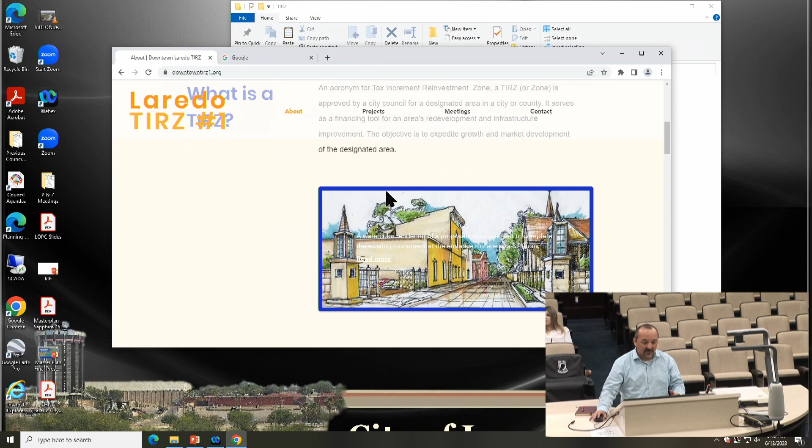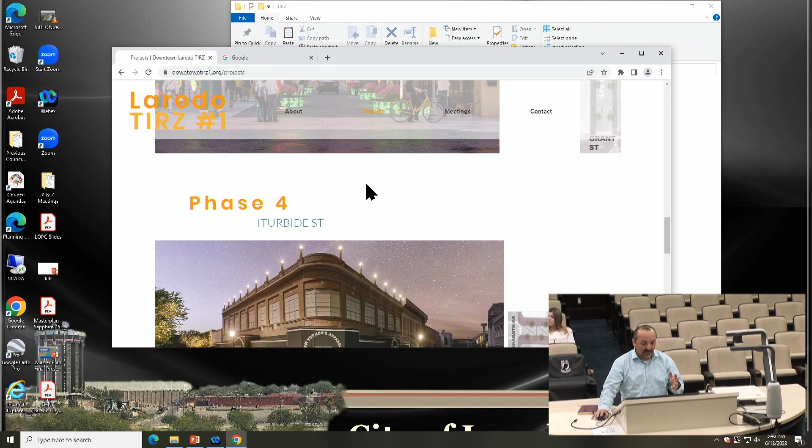We'll make sure to get with the planning department to link to it. We do have our about the TIRZ section, the history of the TIRZ, the current board of directors, and the related documents related to the formation of the TIRZ. We do need to update it a little bit. We have more information related to the phase 1 projects. Again, we'll work on that here to get it more up to date.

It does have the meetings, so all of the meetings are on here. If you click here for access, it takes you to the City of Laredo's YouTube webpage, which has all of the meetings listed. So all of this information is readily available and accessible to anyone that wants to find it.

Do you have minutes, Rick? Do you have the minutes up? I don't have the minutes on here, so we're trying to collect all of those. I know we have some. If you can send those to us, we'll link those here as well. We'll go ahead and create another tab for the minutes and just add it to it. So this is a work in progress, obviously, but it's there, and we can certainly tweak it as we see fit.

Just to let you all know, we did obtain the domain for 2 years. It was like buy one, get one free, so we got it for an extra year. And we went ahead and purchased the hosting for a year, so that was the cheapest way to do it. At the next board meeting, we'll run those invoices by so you all can see what that cost was, but it was pretty minimal.

So you're saying Able City is the owner of the site for right now? Yes, for now. Were we going to switch it over, or compensate you guys for doing that? No, I think at the last meeting we were directed to just manage it as a reimbursable expense. It belongs to the TIRZ, not to us. I'm just saying we'll help you guys manage it. So if you tell us what to put on it, what to move, we're certainly available to do that.

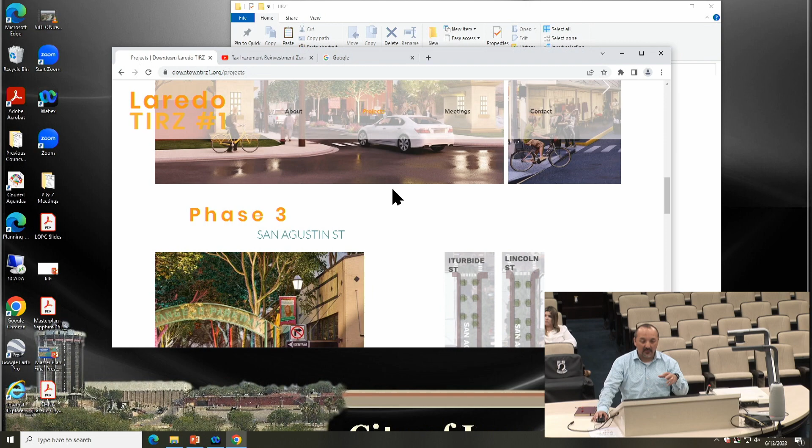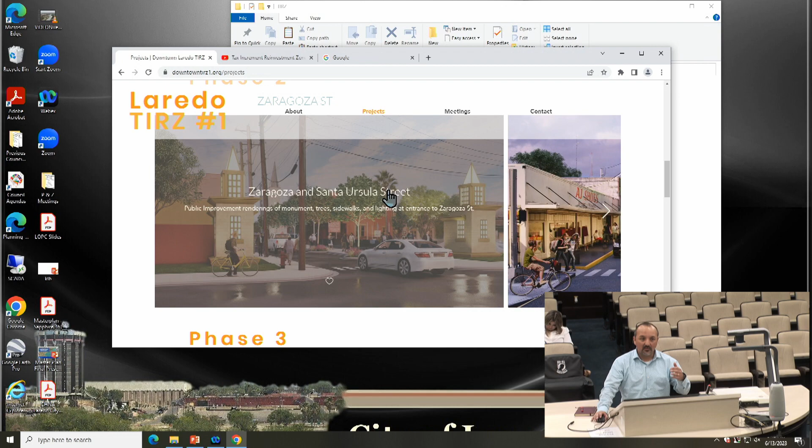Rick, is it possible to also add some conceptual drawings? Whatever you feel comfortable sharing in terms of construction drawings. Under projects, we're going to revamp this a little bit to show the latest information. We had listed phase one, phase two, phase three, but we'll revamp that to show phase one, which is the project KCI is currently working on, and then phase two, which is the grant we're attempting to get. So we'll revamp this to have the most current information on it. And it has the zone map, right? Yeah, here it is. Okay, great.

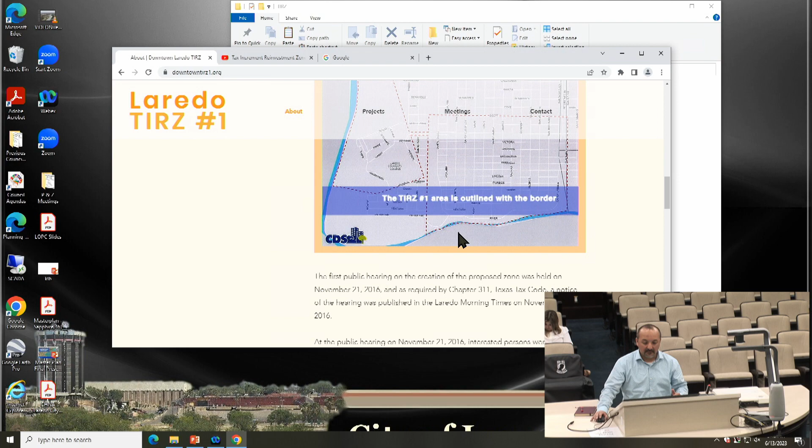So with that said, the only other thing we want to report on is, I think we have an item there for the murals. I know that's been a topic of conversation as we've gone through this. I reached out to the Mural and Wayfinding Committee for a meeting late on Friday. I know it was a quick turnaround, so we weren't able to meet, but we did look at some different options, and I have a brief presentation to go through for you all.

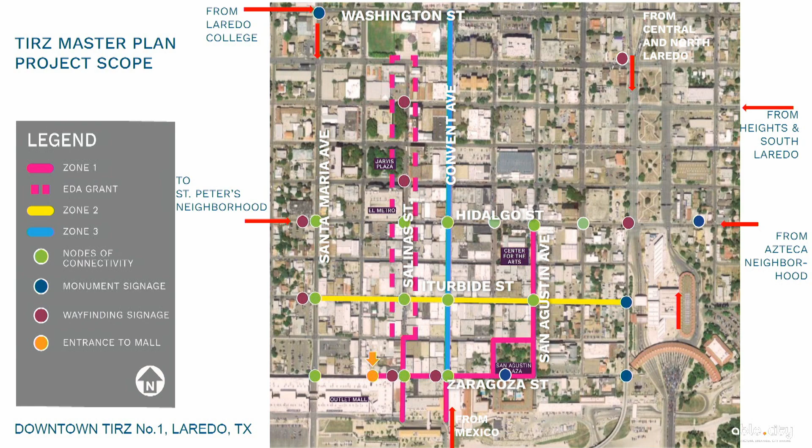Okay, here it is. So again, a presentation on the murals, more related to procurement, because that's the next big hurdle we need to take on. Again, the map, we show this to remind everybody of the scope we're working on. We presented, I want to say back in December 2021, some suggested mural locations, and we've listed about 7 of them here, 8 actually.

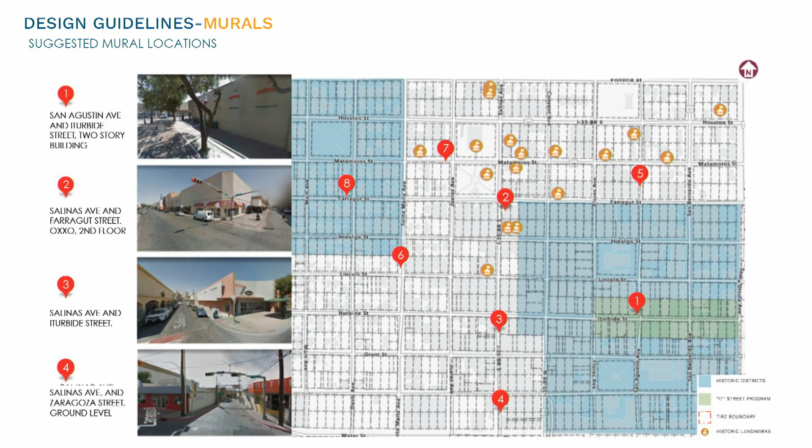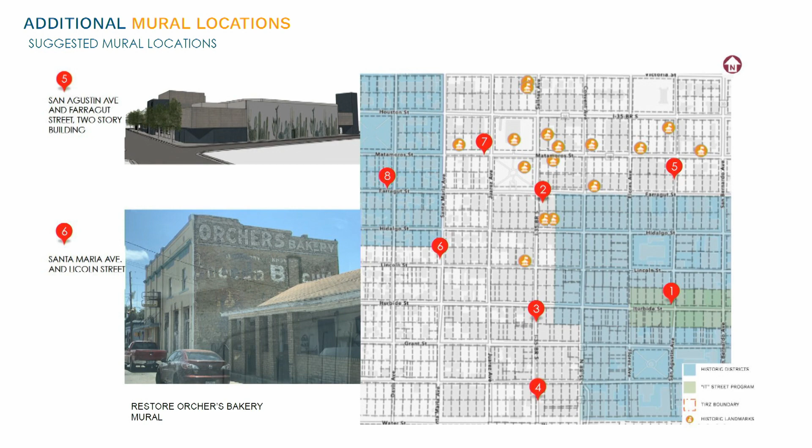We met as a team earlier today to narrow some locations down to move forward. You can see the first 4 here, some great locations where we could probably put murals. We have the old HEB, which is now going to be the Sheriff's Office building, the Orcher's Bakery mural, the Housing Authority building, and this wall along Farragut and Davis Street, which is a little off the beaten path.

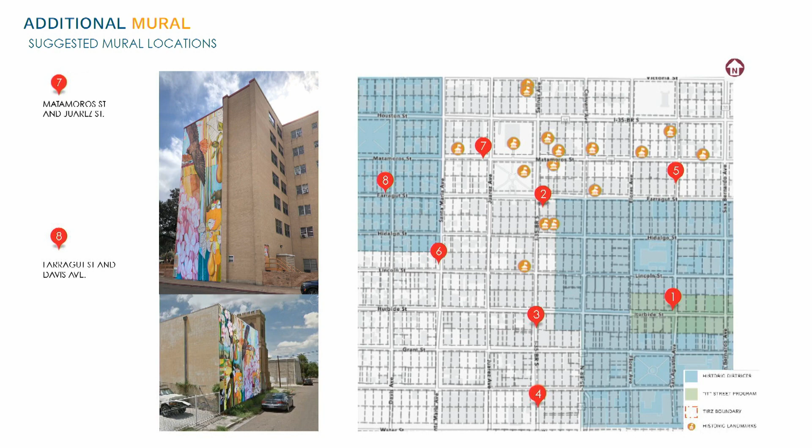Looking at this, we think the locations we should be targeting currently are the publicly owned facilities, to minimize that shared agreement timeline. If it's a private building, we need to find the owner and go through the whole process of getting them to agree to allow us to do murals there. So we wanted to hone in on these 2 locations to start, since they were already on our list.

One, we can talk to Webb County. We can also approach the Housing Authority about allowing us to utilize these spaces for the murals. Now, we know we're still going to have to get an agreement with them to do that, but we think that it's an entity that should be easier to work with, we feel.

So we wanted to narrow it down to these 2 locations. Now, of course, this is ultimately your decision. We just wanted to bring these recommendations to you guys. So that's one thing we'd like the TIRZ board to do: rank these locations, or tell us if you even agree with them. If you agree, then rank them so we can approach the different entities in that order to see if we can get them to agree to enter into that agreement with them. So that's the first item.

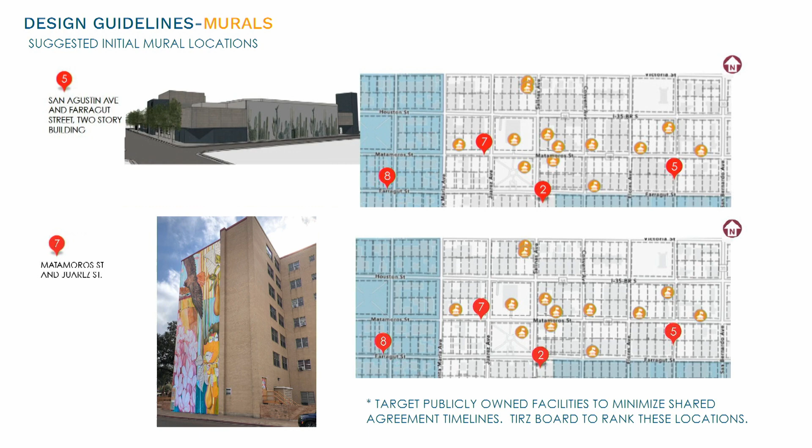This next one is related to the procurement. We did receive, through community development, the RFQ submittal process they used for the mural they did here at the City Hall Apartments, right at the corner of Convent and Houston. It was very simple — I think they listed a budget of like $10,000. I actually brought that with me so y'all can see.

So they issued a call for proposals. Let me try to zoom in a little more. There you go. So we can certainly use this as a template to move forward with getting procurement for the murals we want to approach. They also had some guidelines, which I believe are these notes here. Again, we don't want to reinvent the wheel — if something is already being used, we'd like to utilize that and make it work.

So the other one was very simple. They were just asking for a concept drawing or image, the name of the artist who will be completing the mural, examples of past work, and a proposed budget.

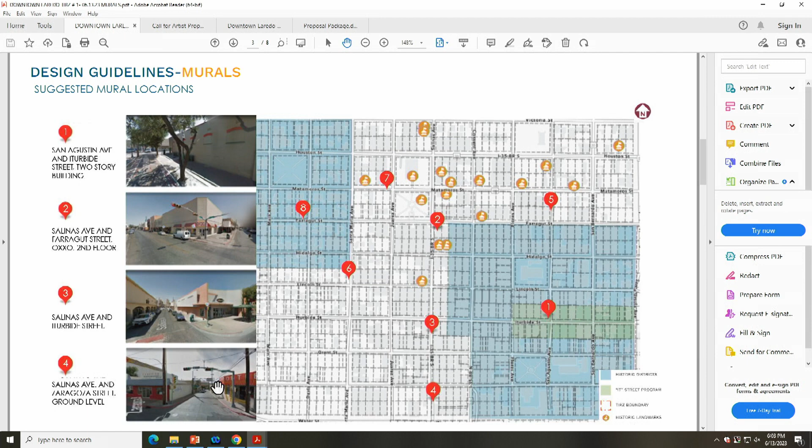Then I think we have the one we talked about, this one that really should be rehabbed, because it's beautiful. Who owns that? I don't know, that's the thing. Just so you know, this particular one, I looked it up before we walked in, this Farragut and Davis Street building, the owner owns that whole half block. I forget, it's like Norton something is the owner.

Acknowledge Councilmember, I saw you walk in, I was like, in the midst of our conversation, thank you for joining us. I know you have some thoughts about this mural program, so at any point, feel free to join us up here if you care to.

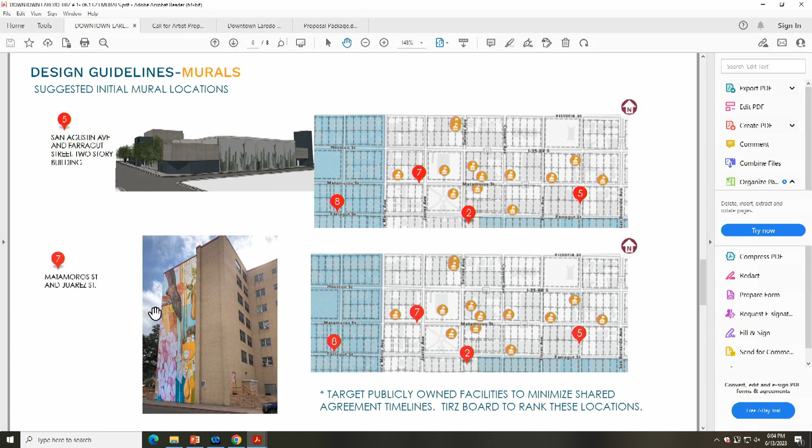So the one location that's not there, and it's not really an open wall like those, is when you come out of Bridge 1 and those vacant buildings right there, that would be great for a storefront mural. I think all of us have walked that location.

There's also a billboard that's unused up there, and I don't know who owns that building, but it would certainly be welcoming. But it would be nice to get an inventory, paperwork already filled out, everything's good to go, and they're part of the inventory, and then we can actually start working with the artist, knowing full well we have everything documented.

Because right now, we're saying these locations are all good to go, but not really, we have to approach the owners, and they have to fill out the paperwork, just so we have that. So are you proposing that our team do that work?

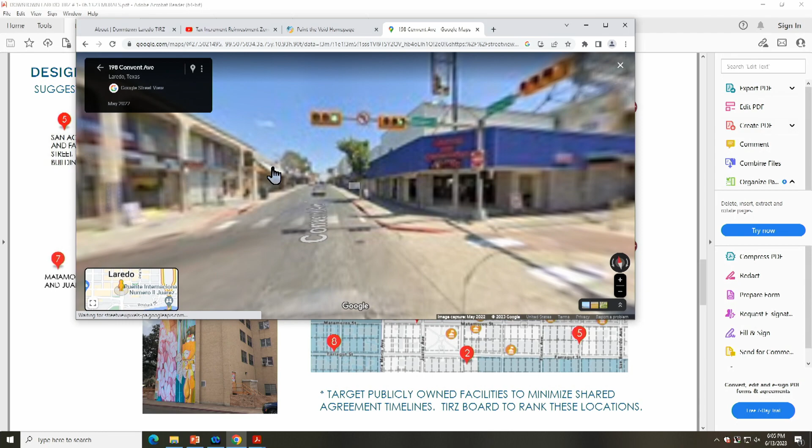I think it's best if it comes from us, because I wouldn't want to put that on an artist to have to go and try to sell the drawings. I'd like that we get the inventory, and then we can bring an artist, and they just worry about painting, they do what they do. So you're using the paint the void model, which is we select the location and then we match the artist.

We just have an inventory of locations, and they're all good to go, and that way we can pick through them as we go. How far are you all from having an inventory? Or have you done a full inventory or close to it? All the storefronts? Or, well, not the storefronts, but the open walls? Because there's plenty of storefronts too.

Like possible locations, I don't think we have a full inventory of all the open locations. Because there's so many, right? No, not at all, no. But we did a pretty thorough walkthrough of all of these. But you want to go back to one?

I want to also, it just occurred to me that the building, one of the buildings where the housing is, one of the things I wanted to bring up with this location and with other locations that we didn't pick because they were historic buildings is that if there's an investment made here and then there's a renovation, historic tax credits can be used for that.

I don't know how old this particular building is, and I don't know if it's registered. Is there any desire to renovate? It's pretty old, but it's not registered that I know of. Well, even though it's not registered, it could be, they could get some, between 25 and 45% tax credit, as you know, of a tax credit program.

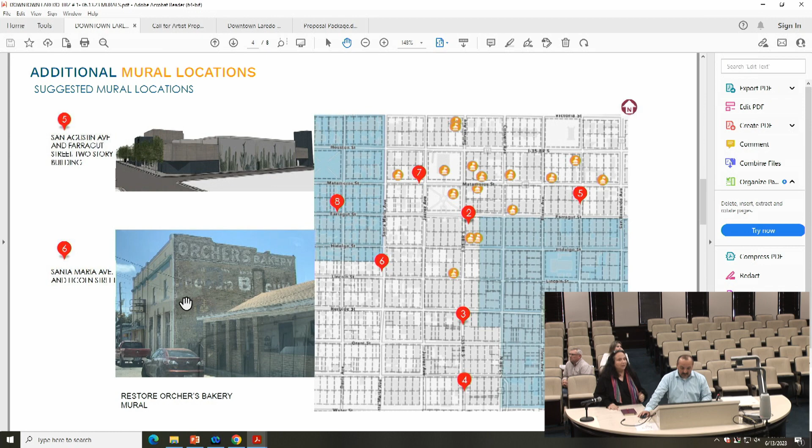And so we have to be cognizant and ask that question when we get to speaking with the city or the housing authority.

On what they're planning to do with that, and if they're planning any renovations in the next 10 years. The other thing is that these murals do fade, so it's not like they last forever. That's another discussion - I don't know what the city does where that's concerned. Do you have any policy on these murals that have gone up, that as they fade, do they repair them?

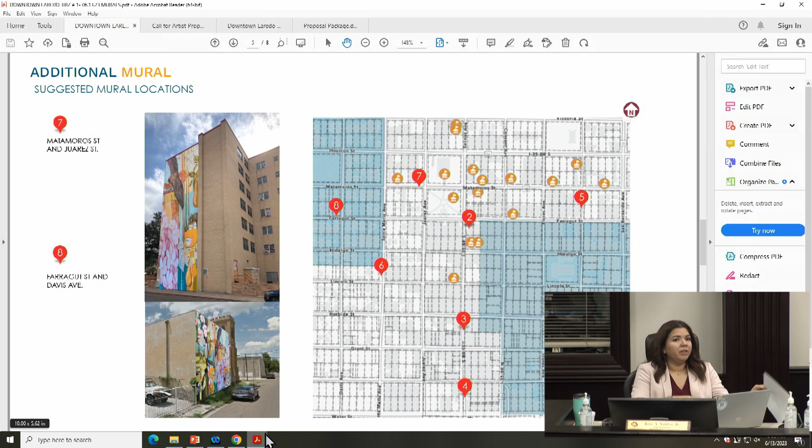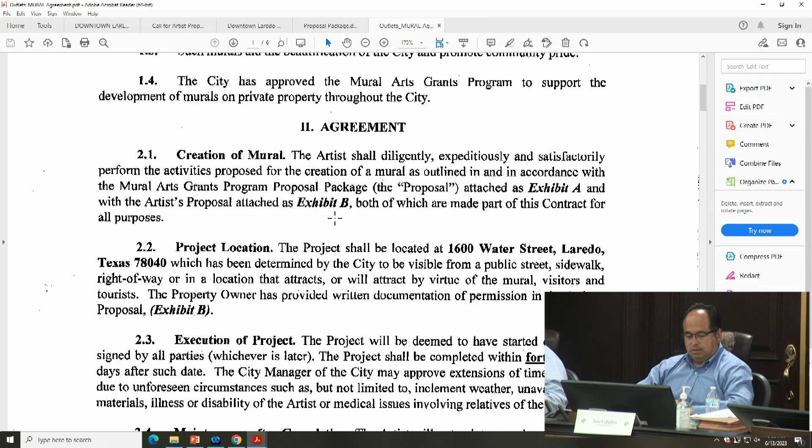So yes, that's what Rick showed. There was a request for 5 years for the artist to come back as part of their original fee agreement. Right here under maintenance after completion: the artist will not paint over, destroy, or alter the mural for no less than 5 years. The artist shall be responsible for maintenance, repairs, restoration, including graffiti abatement during its lifetime, which shall be no less than 5 years.

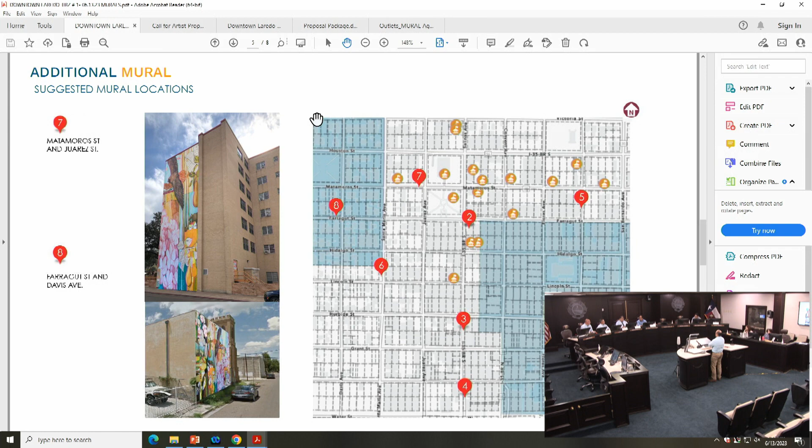So for the rest of the board, do you have an inclination on whether we want to identify the locations ourselves? Is that your preference? Yes, we should. I do like the idea of moving quickly on the public spaces where we don't have to work with private landowners, identify the historical questions, and go through that process to get some traction going.

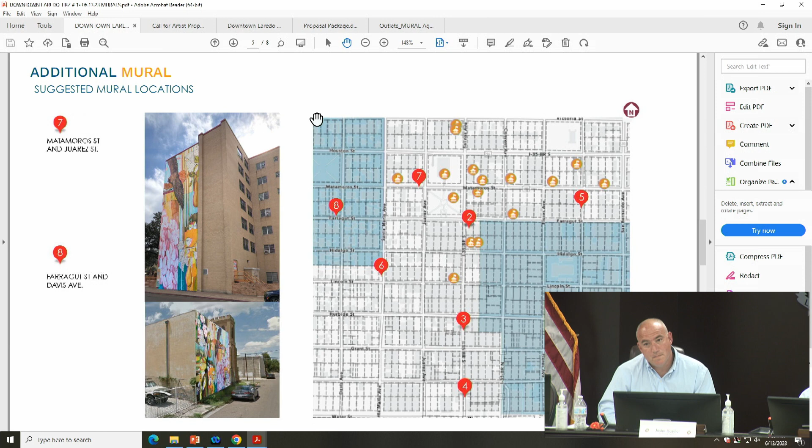I think I like that idea. We can handle it, like you said, tackle it on both sides. Because it could take off, and then we get a business person that comes in and says, hey, I've got a wall, I'd like to do that - where do I go? We have a place to send them.

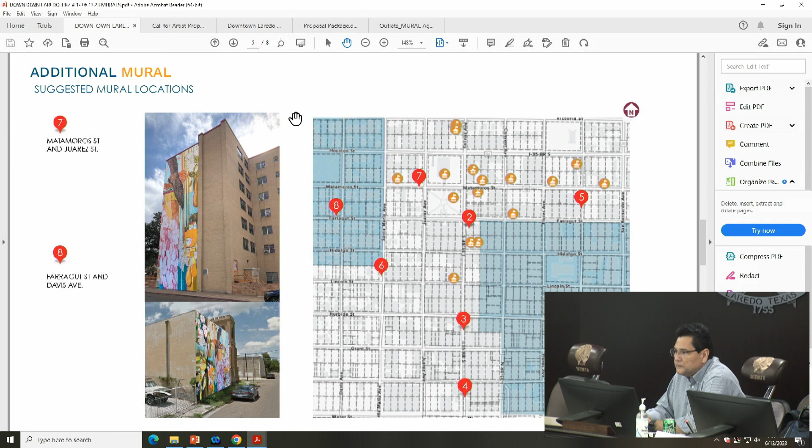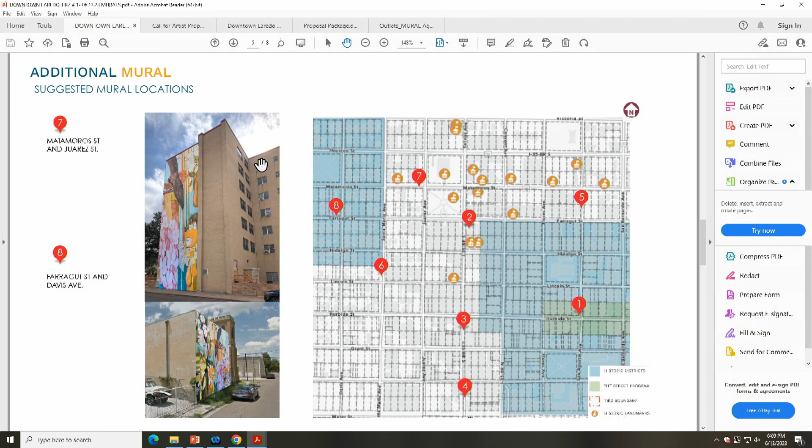Okay, so I'll entertain a motion on this item as you all see us moving forward with this program. We wait until we get to action. Oh yes, correct, we're still in discussion, so yeah, we'll wait, sorry, okay.

I don't have the agenda in front of me, but related to the grant, as you all met two weeks ago, I apologize for not being here. I think the tree grant went through. We actually have already worked with KCI to add more trees along some of our streets, now that we know we can get them covered. So we're working on that currently.

I believe we've also, for the Phase 2 grant, submitted the project information form, correct? Yes, it got resubmitted. It essentially looks the same way as the April one with a minor change on the description. I'll send you both any grant forms to load up to the website so people can print them, including others that we've done - the MPO and the various grant programs. Beyond that, those are the only updates I have currently.

Oh, thank you. So for purposes of Mr. Martinez, Mr. Castillo - what we did essentially on that urban forestry grant is we pledged, it's not binding because it's more of a support commitment letter, that we would pull the expenditure for the trees out of our grant and back it with that expense from this new grant. It also opened up the opportunity, if we did more, to leverage that grant. So although it was a commitment in terms of a letter, it's not a financial commitment yet. It'll come back to us if they get the award.

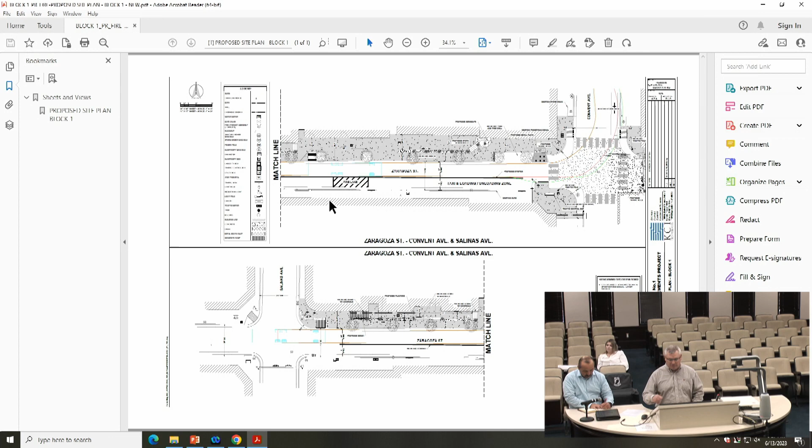We've submitted this to the fire department. I'm wanting to not only just submit it to them, but I do want to have a meeting with them so that we can kind of help explain what they see.

So just in this example here, this is the Zaragoza Street, Block 1, between Salinas and Convent. The east-west streets were what we were told by the fire department are the streets that their aerial ladder truck needs accessibility to drive down. The aerial ladder truck is their largest vehicle.

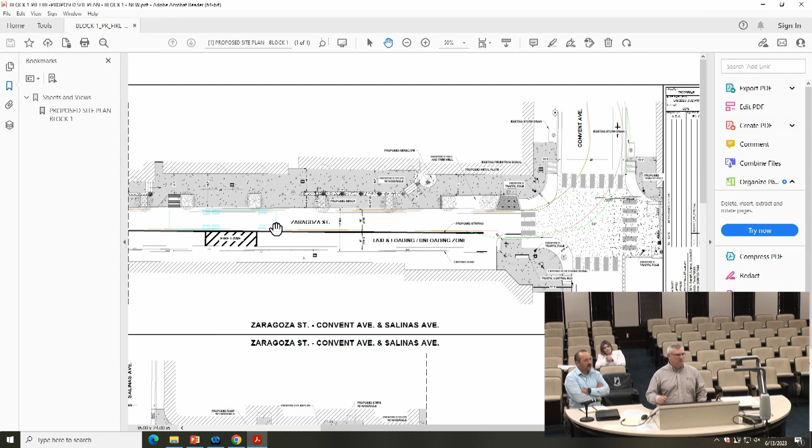And so the east-west is kind of where we need to be mindful of their movement. And then as they turn onto some of these more important streets, Santa Ursula, they come down Santa Ursula and turn. And here on this one, they come down Zaragoza to the end where it's closed off for pedestrians only, so their only choice is to turn north.

So what you see here is, I know it's kind of cyan, might be hard to see, but it's right here. This is the aerial ladder truck. And so what we do is we use a turning software called AutoTURN. It's a turning software you can use in AutoCAD that shows you the maneuverability, what happens when a certain type of vehicle turns. We actually had to custom design this vehicle for the aerial ladder truck, so that took a little time to get done.

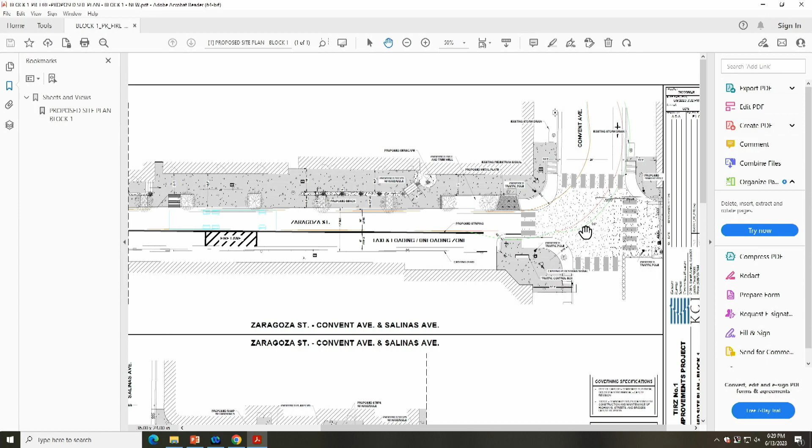What you see here is the truck, and as it comes to the intersection, the line in red, which I'm pointing at, those are the wheels, the wheel path. And the green line, which is a little fainter—let me zoom into it—you see this green line right here. That green line is kind of their bumper, the exterior overhang bumper.

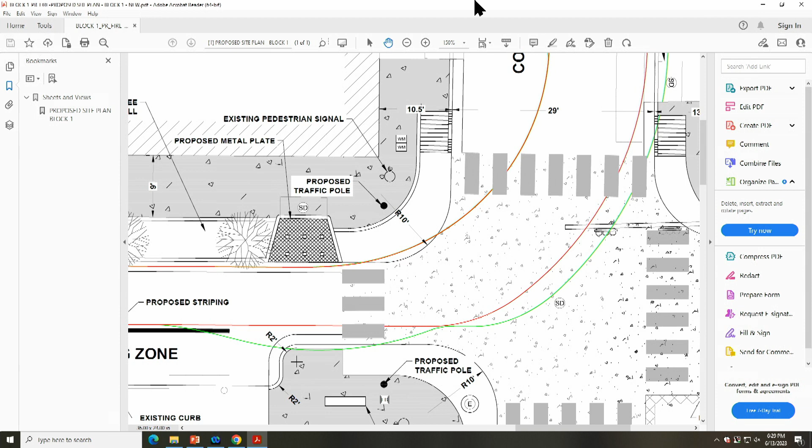So what we're having to do is run the analysis of the vehicle staying within the curb and then look at what it affects. We ran this analysis at this particular intersection and then came back and made adjustments to make it work. I think we've accommodated that for them, and we've sent this via email to them, and I'm working on setting up a meeting here, hopefully this week, so that I can sit down and discuss this and hopefully get concurrence from the fire department.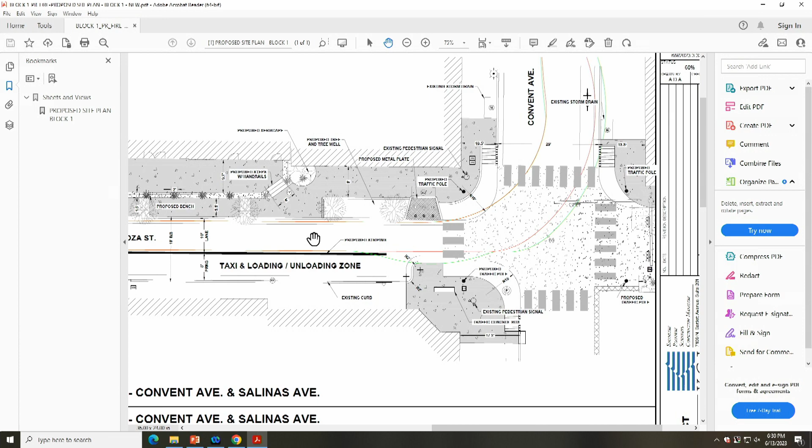One of the other concerns they had, which you'll see on this exhibit, is whenever they stop mid-block to get on their aerial truck and bring the ladder up, they stop and the truck has booms that stick out. They project out of the truck and set down, making sure the truck is on a level spot before they bring the ladder up.

In many of the current streets downtown, you'll see there's no room to do that. Even where they drive with cars parked on both sides, they struggle with putting out the booms. And if they don't put the booms out, then the ladder can't go up. So that was one of their concerns, to try to be mindful of finding some spots where they could possibly do that.

Mr. Chairman? Yes. Just real quick, a comment. I don't think when downtown was designed, they were designing to that size of vehicle. So they're wanting us to adjust downtown to fit a vehicle that was never designed to be going downtown.

Does the fire department have other options for the downtown area, other procedures? Because obviously most of those streets aren't going to be able to take that big boom. And I'm not saying I don't want a fire truck there, I'm just saying it seems like we're adjusting to the truck, and we're not going to win that battle.

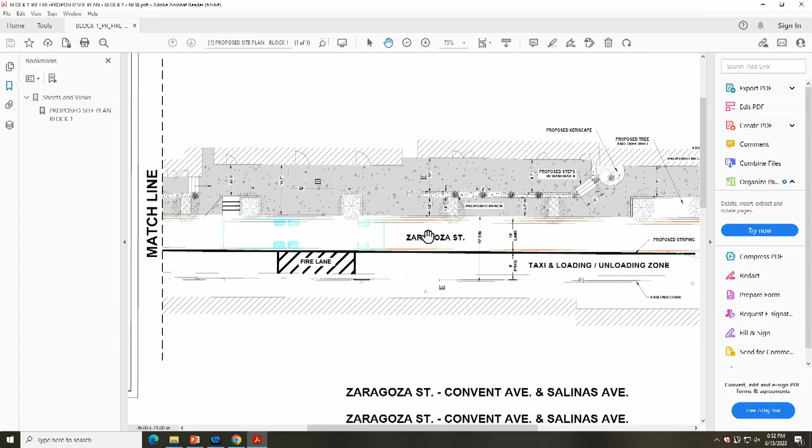So Edward, the give here, or the concession to accommodate the fire department, is you created a fire lane so they could go out and extend those legs, right? So on this particular block, because we're only improving the north side due to the taxi and loading on the south side, rather than create a curbed area on the south side, we thought it best to label it as a fire lane, so you lose one loading/unloading spot to make that happen.

If not doing that, then the person parked there would need to move their car to accommodate. If we decided not to do that, we probably couldn't get a permit. But that would be taking that concession back, saying if there's a car there, ask them to move so you could set your truck up. Correct, or they would move it for a fire. I think they would, they won't ask for it. I'm sure there's some ability.

What is the most important give or concession that you're having to do with the design because of accommodation to the fire department?

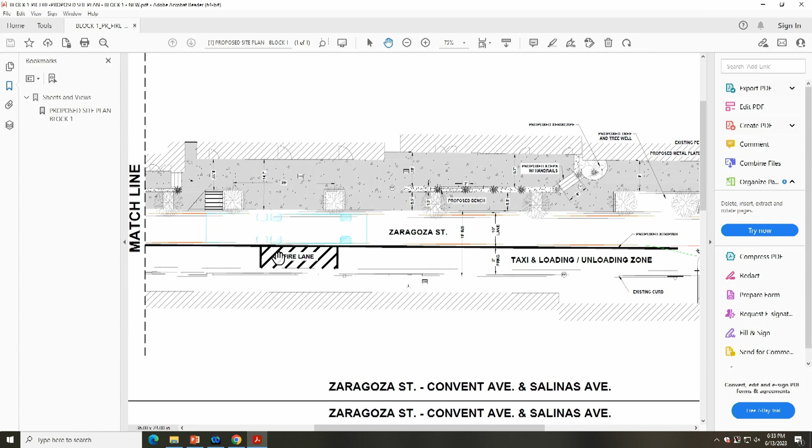It's not really, I mean, there's some concession at the intersection, because we originally had some bump outs, as we call them, that brought the sidewalks in a little bit. We had to take those out, or look at a different approach. As you can see here, the fire truck going from this lane literally has to go to the outside lane of Convent, because Convent's a wide street and it takes up almost the entire lane. Here you can see the wheel path going over a small portion of the sidewalk, and at this point the sidewalk is level with the road, so it's doable. But there were concessions to the intersection we had to make to allow that.

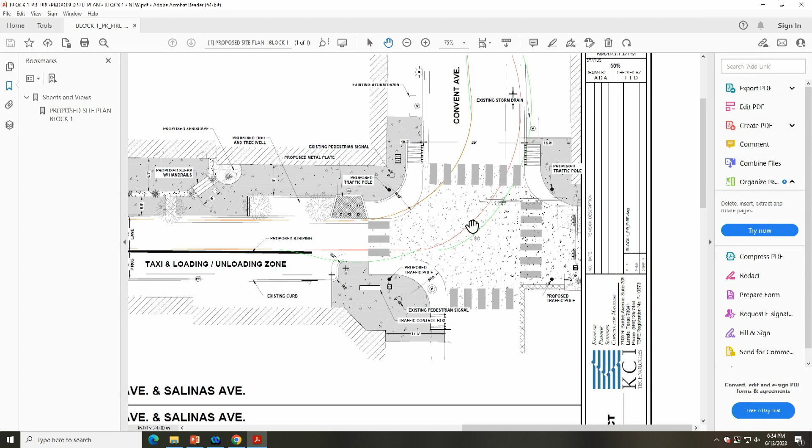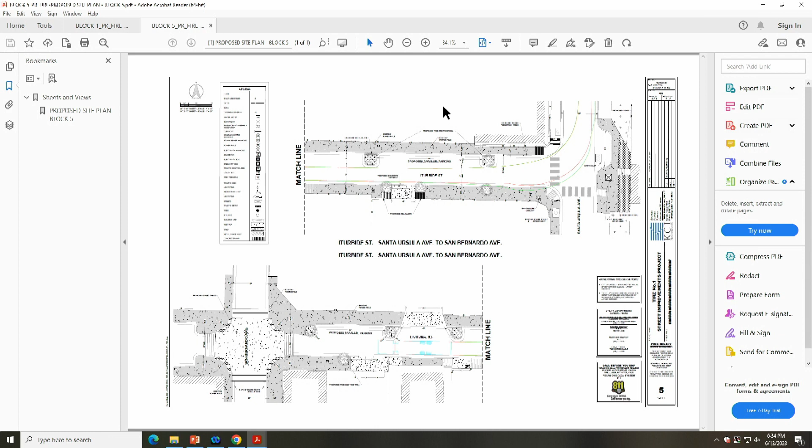And then the other one is, you can see here, striping out a fire lane. I can open up one of the other ones also. You're doing that in multiple locations? So we are doing that at multiple locations. We're also losing parking, right? One parking space, you would end up losing some parking space.

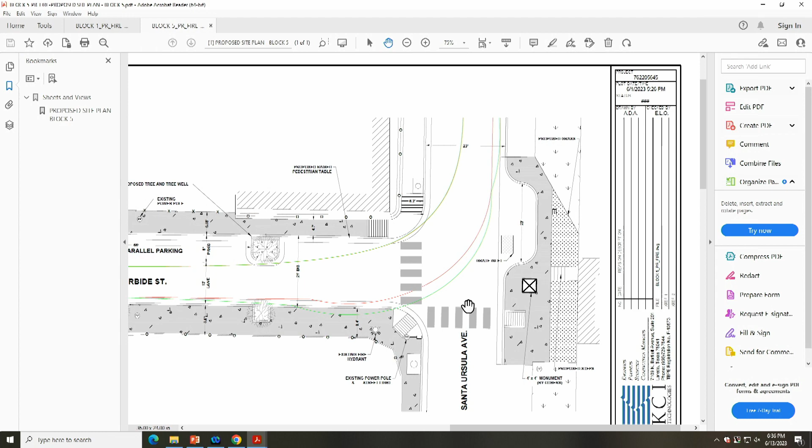This is Santa Ursula going to Iturbide. Right now you come southbound on Santa Ursula, and this maneuver starts over here and goes this way. Following the same path, we had some bump outs in this area here and here that we had to constrain back to the path the truck is making. They come down Santa Ursula, and depending on where the fire is in downtown, they find the east-west road that gets them there from Santa Ursula. So this is an important path from Santa Ursula down to Iturbide. Once they're on Iturbide, they don't necessarily turn north-south on the streets. What they did when they were out there was go all the way to Santa Maria, which is a wider street, where they could turn north-south and get themselves back out from downtown. So we made some concessions to the intersection here to allow for this maneuver.

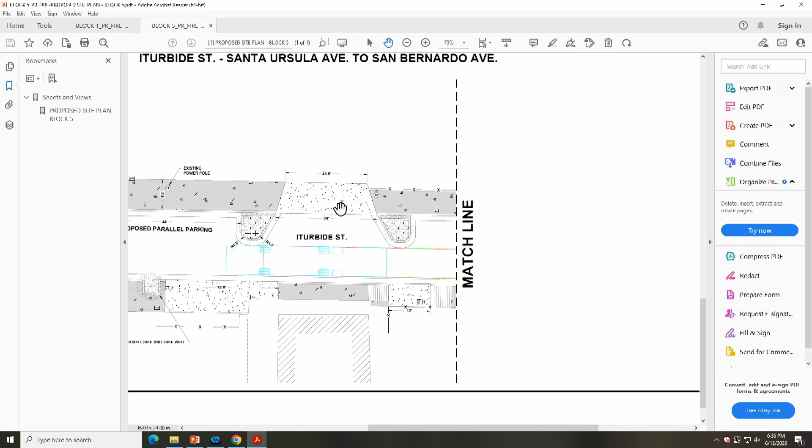What we did on this particular block was finding a mid-block spot for them to set up. On this section of Iturbide, you still have driveways to some businesses or properties, north and south. So strategically, here we're not really losing anything because we can show them: you can park right here and extend your booms out in front of the driveway. Nobody's parking in front of that driveway, right? This is actually the driveway right across from the corner where they have the food truck in this parking lot over here, across from the Mexi-Q that's there. So in this particular block, I think we were able to accommodate where it probably didn't affect anything.

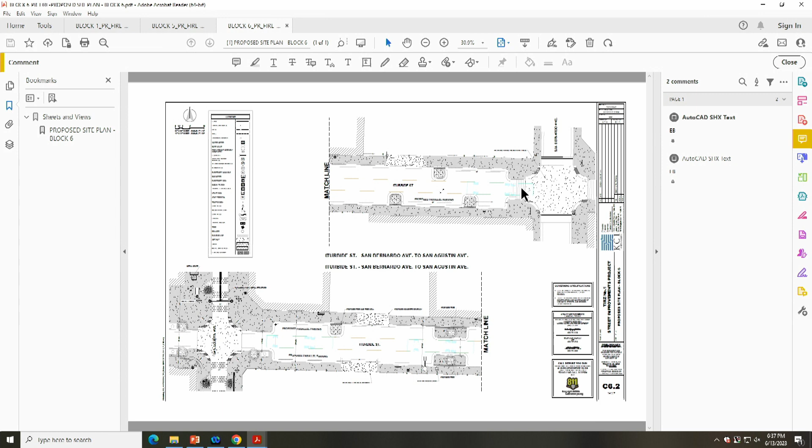But on the next block over, this is the Siete Banderas block coming through there. This is our solution: the fire truck, we ended up creating a larger bump out island that would allow the fire truck to extend the boom here, here, here, and here. So those booms can be placed on the sidewalk. Instead of having the trees staggered down the street, we'd have to find a spot in the middle to give it to them.

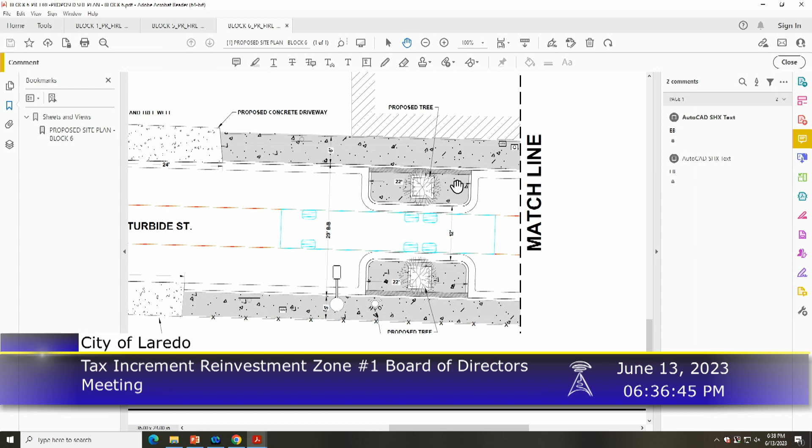So, as an observation, couldn't they do that in the intersection so we don't have to do that? Because they could reach Siete Banderas from there. Correct, because I think we're locking ourselves into that 12-foot right of way where we don't need to. So we're not showing it in the drawing because it's exactly what you just said. If they park at the intersection and set up their booms, then it works, right?

But again, we need to check the analysis of how the ladder truck works and how far it can reach and extend. We understood that it didn't reach, so you'd still have to have one in the middle. Because the blocks are 333 feet, so if they set up, that ladder truck would have to be 150 feet long.

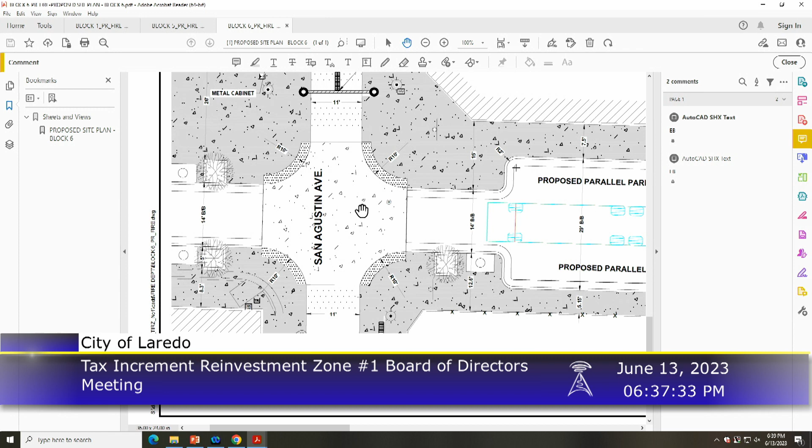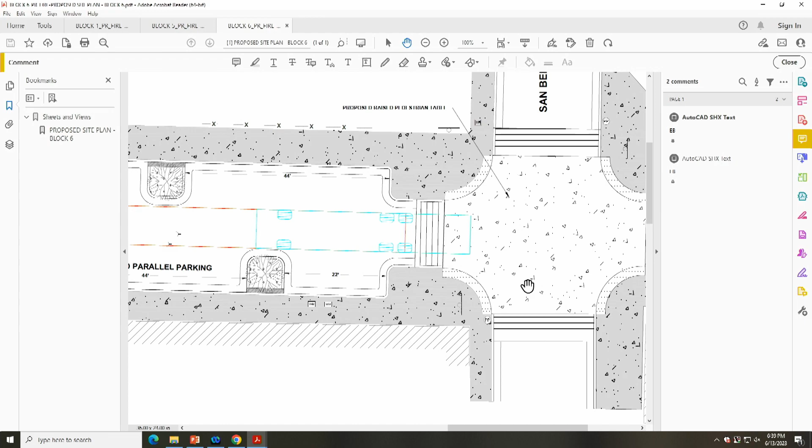Because Siete Banderas is at the corner. Yes, sir, in this particular drawing it's at this corner right here, and this is San Bernardo. So the aerial ladder truck could park right there and extend its boom and reach however it could reach radially from that corner. But if it's set up at San Bernardo and then at San Agustin, we understood that it would not reach to the middle.

We'd have to give another spot to the middle, so the discussion there is again kind of what you've said. I mean, they don't have it now, right? Would it be a problem to remove that concession? Or have you already sent it? We've emailed it to them as a point of discussion.

But I guess at this point, it's full of parking lots too. I'm sure somebody could build a multi-story building a few years from now, but there's definitely access today from parking lots or the intersection for Siete Banderas and the J.C. Twist building too.

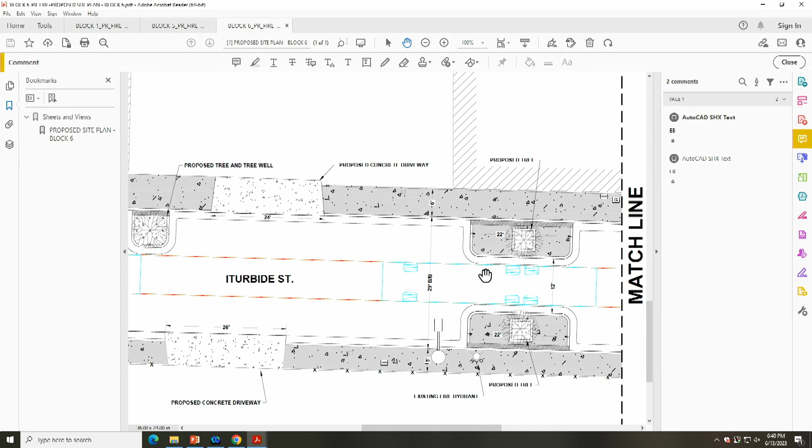Well, there's also options for narrower trucks. I was Googling to see if there's such a thing with a ladder. Because to me that's not your preferred design, you had it staggered, I remember that. We had it staggered, correct. This ends up taking up some more space.

I mean, we're able to put a tree in between the booms where the booms can land, but does anybody else feel strongly about it? From our design team, I don't think we can beat the fire department, to be honest with you. But we've received some comments and we're just trying to find the best way to address those comments.

And I agree, I think there needs to be a cooperative discussion. I think the concession, what exists right now, is less of an opportunity than what we are building, that's in my opinion. Yeah, we just gotta work with them.

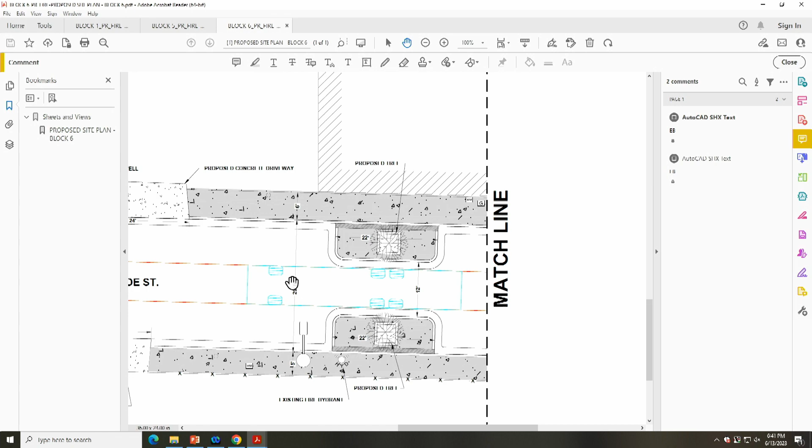This particular one seems important to me, that we don't lock ourselves back into that 12-foot width. Is it continuously 12 feet down all the way on driveways onto the street, to Santa Ursula, Edward? Does it stay 12 feet? We might be able to do it there, but it depends on that.

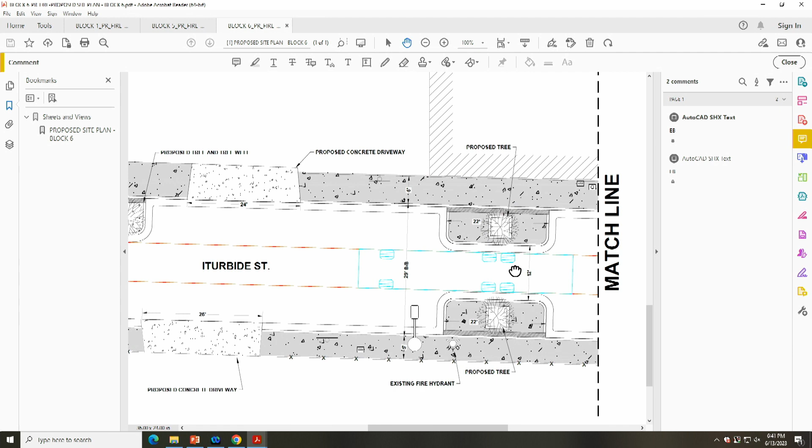Does it stay 12 feet from Santa Ursula to the Convent, or to the project, the end of the project area? Yeah, for the most part we've got 12 feet, and then at the intersections, depending on location, here we were able to get 14 feet, here it's 15 feet. At this particular intersection it almost has to do with lining up curb lines a bit, but for the most part we're trying to maintain a minimum of 11 feet. In some spots we go 12, and then 14 at the intersections.

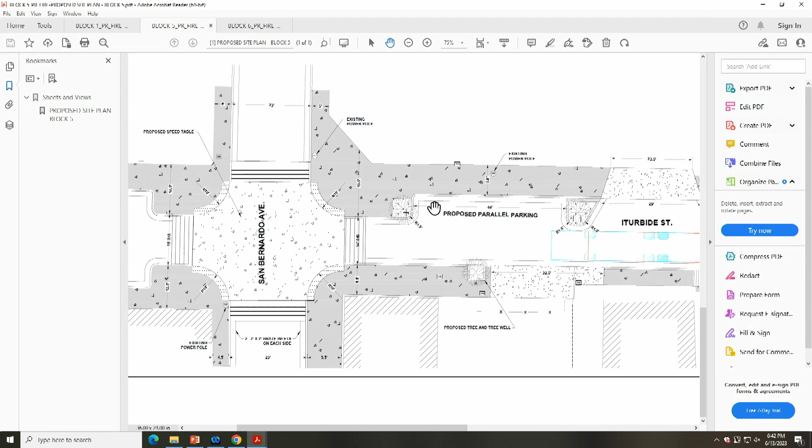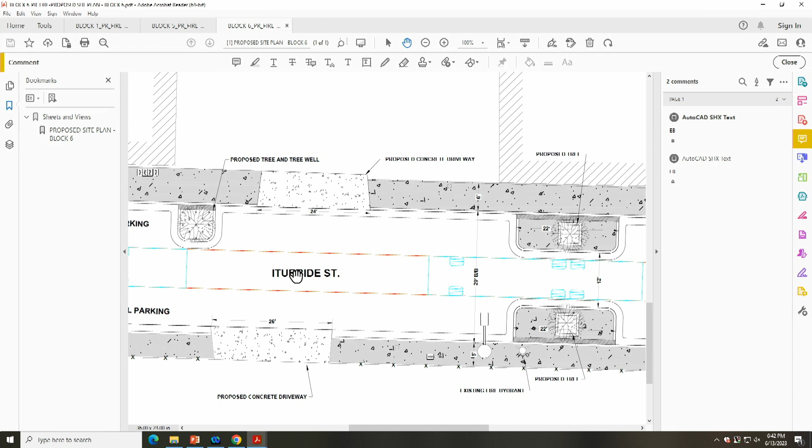So there's some existing driveways on this block that maybe aren't mid-block, but we can utilize them to essentially get us the parking that we want. The city has a parking lot, and then there's JC Twist, and we're not messing with those driveways, so technically that's a space where they can push their booms out. We just need to see if it fits. These driveways are staggered a little bit, so we have to see how that could work for them.

But a lot of what we've been doing here is just trying to really think outside the box on some of these to address the comments, really. We presented the plan set for review, and those are the comments we get back, and we're trying to figure out how to address them.

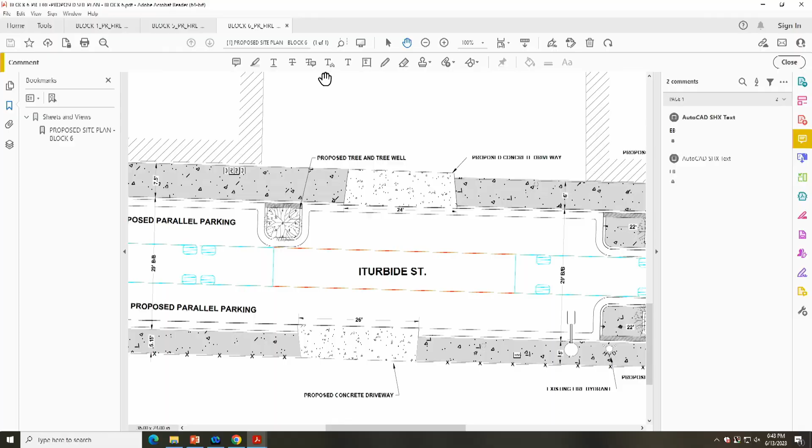It's quite unique, with some different approaches to it.

Mr. Martinez doesn't think we have a shot, but I would like for you to notate my comment. Tell him that you had that comment from a board member.

Excuse me, are we considering removing parking and making this all pedestrian, like Thursday, Friday, Saturday, Sunday, where there's no parking on this street? We haven't really discussed that. It's just been more of a technical exercise than a program.

Because I'm hearing it's getting better and more popular, I fear having those cars go through there when you have a bunch of people outside the clubs and stuff like that, and it kind of stops the traffic during the weekends. I did submit a letter to the police chief to suggest they make it pedestrian. I think even PD was liking the idea for safety. And if that's the case, it helps out the fire department also, because there's no cars parked, they can open up whenever and wherever. Right, that makes sense.

All right, so for the sake of time, you're gonna get feedback from the fire department. Edward, realistically, when do you see yourself getting to 100% ready to put this out? So really, it's getting feedback from the fire department, getting some feedback from the traffic department on...

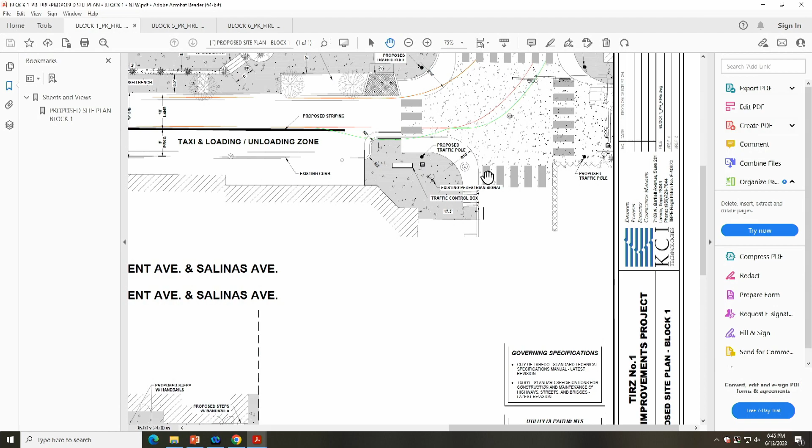I'll go back to the convent one. I'll bring you back to the Convent intersection. This is Convent and Zaragoza. So we've taken some of that feedback and accommodated the fire department's turning maneuver, and it caused us to look at a different approach to the sidewalk ramps. So what you see here is the sidewalk ramps where at this point the sidewalk is the same level as the street. So you ramp down, and then at the intersection you'll have a large area they can maneuver, whether they ramp down once and cross here, or come over here and cross over here, and so on.

So in doing that, the other concept, working with the design team, is looking at relocating the traffic signal poles that are at the four corners. The architect team has a concept of a feature that can be hung up over this intersection, and in doing so, we would need to relocate the traffic signal poles to accommodate that.

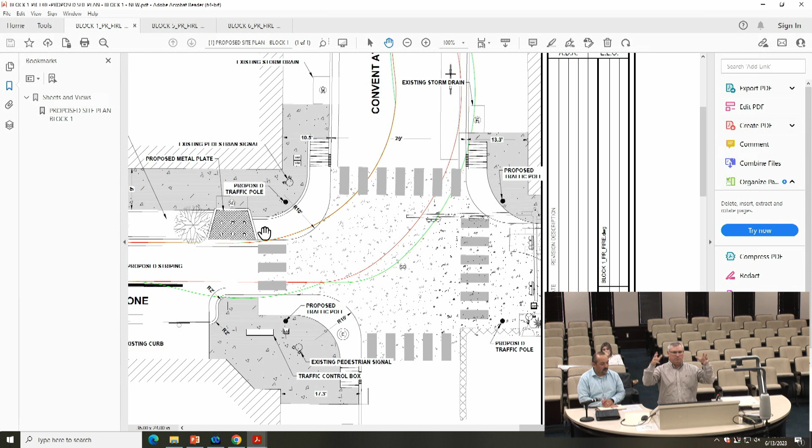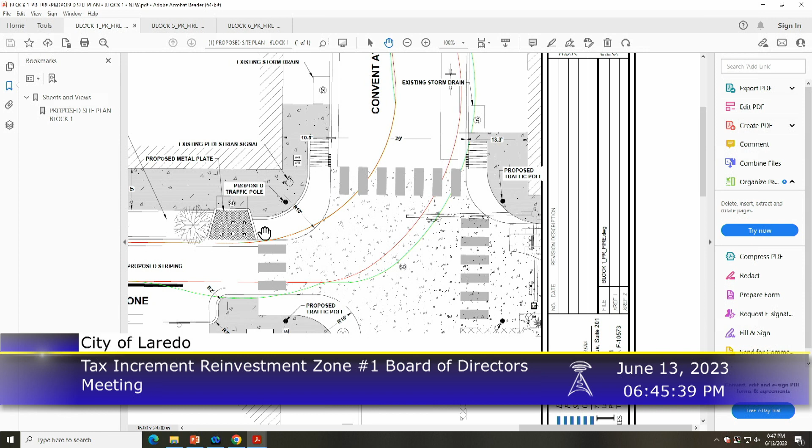There's a design in Houston you may be familiar with, kind of at the Galleria area, Galleria Westheimer, where they've got that silver ring that hangs over the intersections. I think generally that's what you all are looking at, but structurally you'll have to bring those traffic poles in so everything can hang on it. For the future. Yeah, for future. So in doing so, we'd need to make sure we can work that out with the traffic department, and then see how we can prep conduits, if it's something that's not done with the phase one project, then we need to look at ways of bringing conduits to those points and capping them or putting them at ground level.

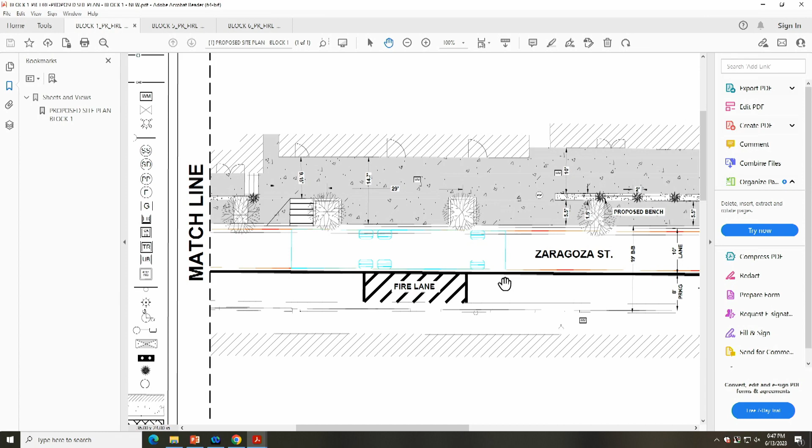So we do have this intersection to get a blessing from the traffic department on, or find out if there's anything else we need to include. And then, going back to what was mentioned earlier with the tree grate, we've added more trees on this particular block, and now we're looking at how that tree and tree grate concept could work. So we've done all those upgrades.

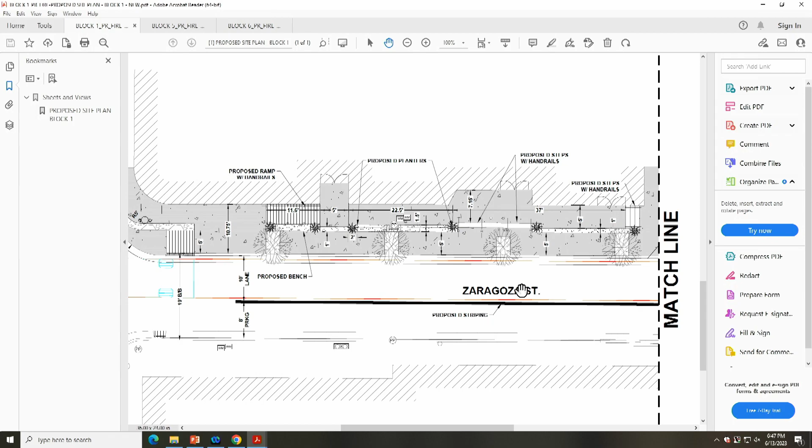Really for me, I could tell you that I'd really like to get through and get the blessing from the final departments. And once we do that, I think it's really 30 to 45 days and we can wrap everything up. I mean, we have... oh, I'm sorry.

We also are coordinating with AEP. Remember, we met with AEP in the field and walked through the Zaragoza project. They're looking at upgrading the poles and relocating some of their poles. I've been communicating with AEP, and last I was told they'll try to have a design and cost estimate for us by next week. So whatever they come up with from a design on this particular block of Zaragoza could affect my design as well.

They requested a follow-up meeting walkthrough for July 18th. So, yeah, we'll need to be there. I am hoping that we can at least be presented with a design before then.

Maybe by next week, if they can get me the design and a cost estimate to relocate all the poles, but how that's gonna affect our project and our cost too is an important component. So in terms of drawings, you're pretty much done, right? You're just tweaking, or?